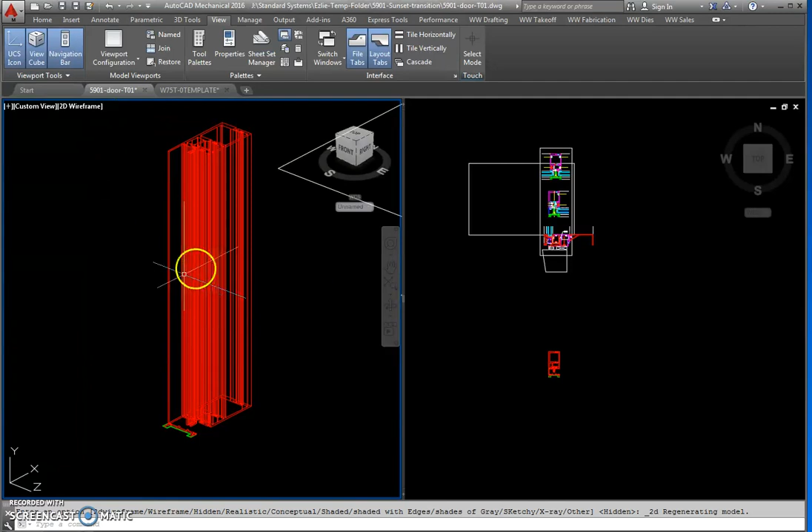If you just click on this word hidden, this is what 2D wireframe looks like. It's just a mess, a bunch of lines, so it's hard to work that way. Go ahead and click on this and change it to hidden, and that's the simplest way to work in 3D so your solid surfaces look like solid surfaces.

Just FYI on this project, right now I could not get these two parts fixed, so I'll have to dig into that a little more on Monday. But for now, we're just going to leave them as they are.

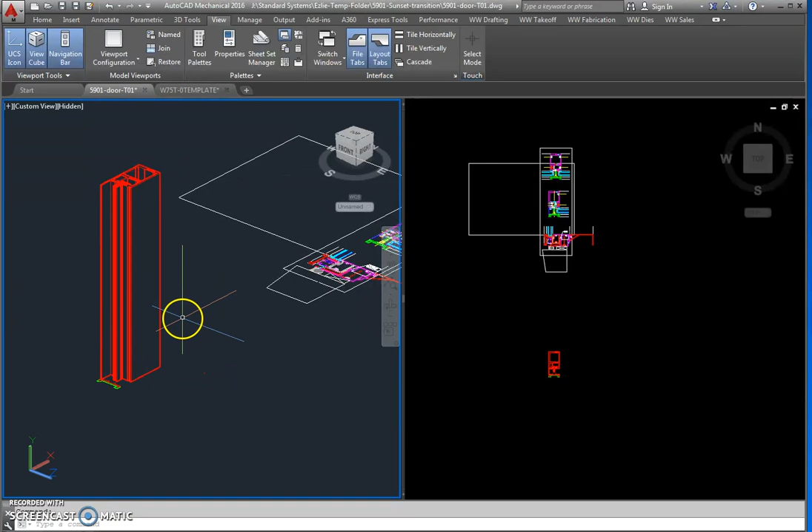Now we're going to extrude the sill member, which will butt up to this vertical member horizontally. To do that, we have to change our UCS. Our UCS is this icon on the bottom, which I know you're aware of. Just keep notice of the orientation it is right now: the Y is going vertically and the X is going left to right.

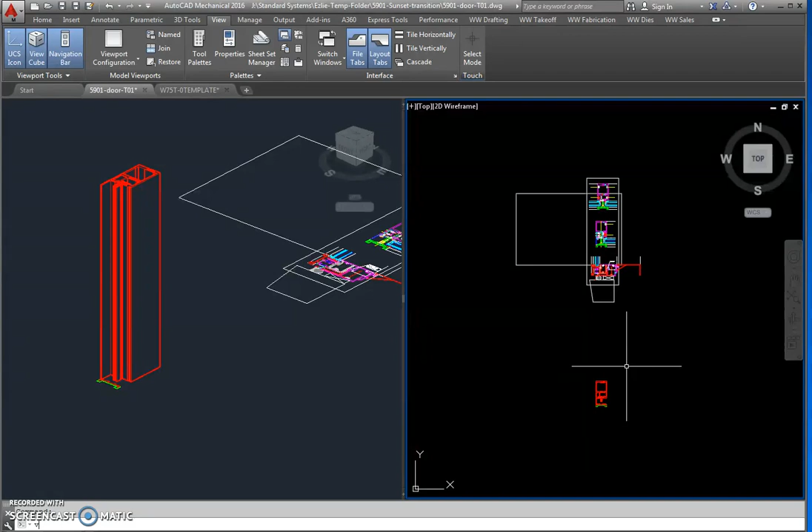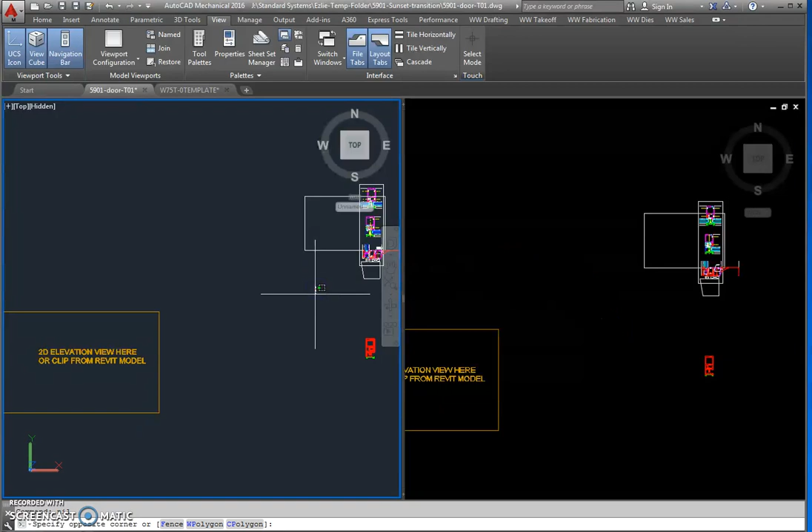To get back to this view, we have a couple default commands. If you type VPP, that means viewport plan, it'll automatically take you back to this plan setup of your UCS. So now if I go to this viewport, which is in a 3D view right now, if I type VPP, you'll see that it changes right back to the vertical plan view, which is the same as on this right side 2D view. Same stuff, just a different view of the same objects.

But now if you want to go back to your isometric view on this left side, we have a command called VPI, which stands for viewport isometric. If I type VPI, it automatically takes me to this 3D view. So those are helpful commands to keep handy. You see how our X and Y is the same orientation as it was in the plan view, it's just that the Z is going vertical and you're looking at it in an ISO view. So those are two commands, VPP for plan view and VPI for isometric.

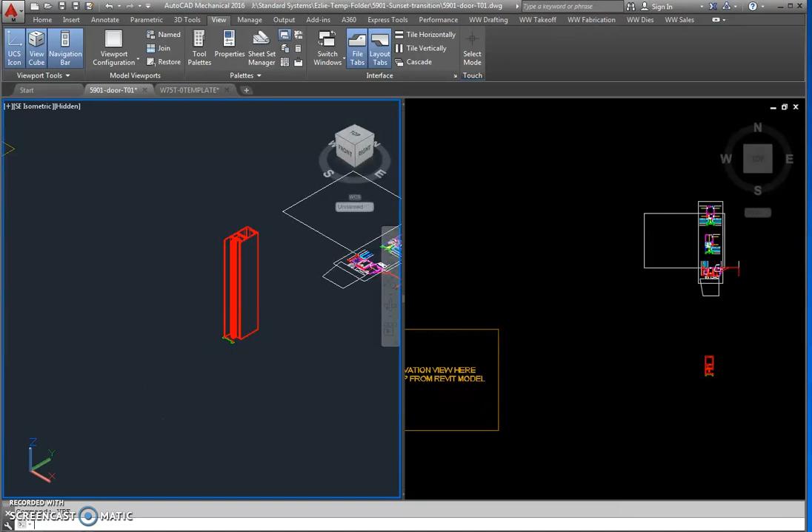For horizontals now, we're going to need one more command, which will be VPE. If I type VPE, you'll see what that does - it takes me to a perpendicular view of that mullion, which is what we need when modeling the horizontal. Because now we want the horizontal to be extruded along that x-axis, which in this view is the z-axis coming at us. That was VPE - I think the E stands for end view.

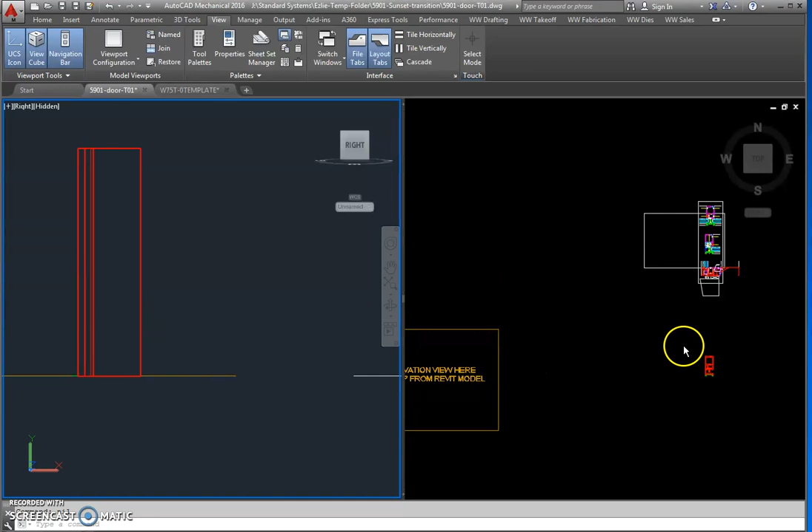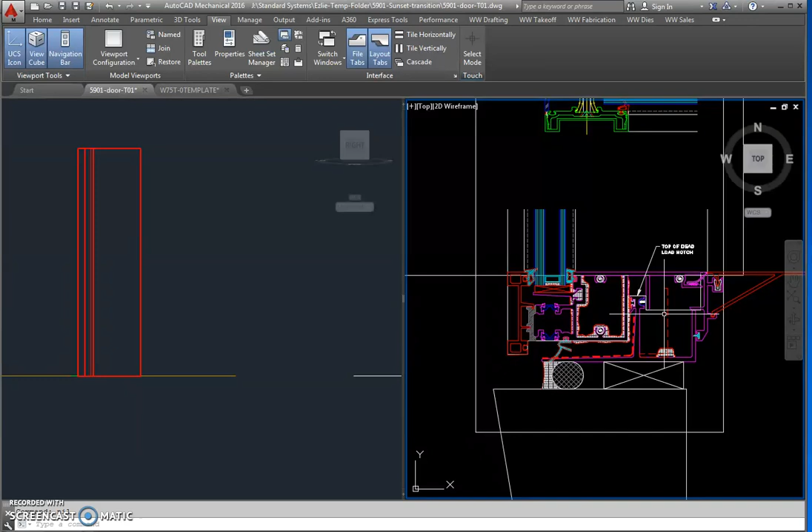Let me show you how you're going to get your horizontal. We're going to do a cut and paste now. From the vertical, all we did was a basic copy, but now since we're changing our view, we need to do a cut and paste. So a Control-C, and we're going to use the pocket of the mullion as our base point, because that's a point we can click on easily. I'm going to click on that as my base point. And now, to select objects, I'm going to select the extrusion, both the outside and that interior part.

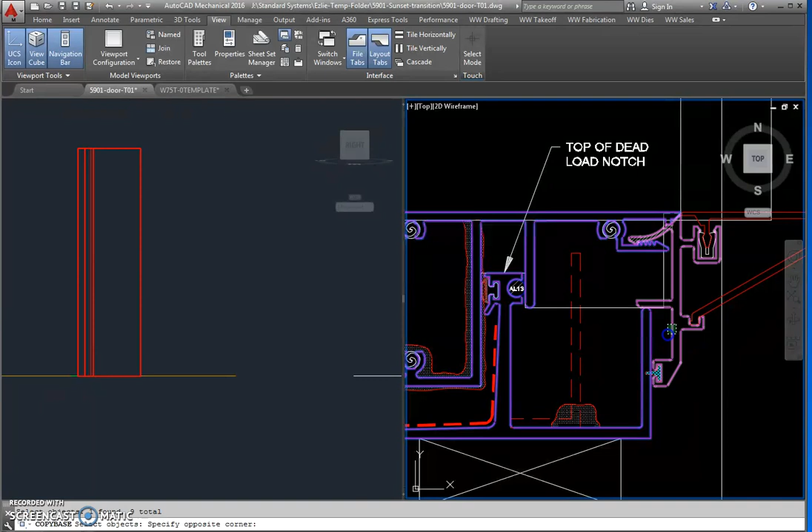Don't forget these blue ISO bars. Just pick all the lines of the extruded parts. We'll need these little cavities in there as well, and we'll also need the sill track, and we're going to need this back filler piece. We'll just do those three. Now I hit enter, and now those are copied on my clipboard.

So now I'm going to go back to this view. If it's hard for you to tell where that pocket is, I'm doing a shift in my wheel to kind of rotate, and I'm going to zoom in here so you can get a viewpoint. This is the corner of the pocket - that line there.

So now if I go back to VPE, now I have a better idea. It's going to be this first line here, that corner, is the edge of the pocket of the vertical.

And if it helps, we could change the color of the angle so it's easier to see that that's not part of the mullion. Usually I do change the colors - I have standard layers in this template for the different objects. Right now it just extruded on the sealant layer because that was the layer I was on, but I do have different vertical 1, 2, 3, miscellaneous parts 1, 2, 3, things like that with different colors already set up. So as you can see, that makes it a little easier, now you could tell that's a different part. Let me just go back into this ISO view so you could better see what I just did.

So I just changed the color of that little member here so that you could more readily see the edge of this jamb mullion. Okay, so now again, I'm going to go back to VPE.

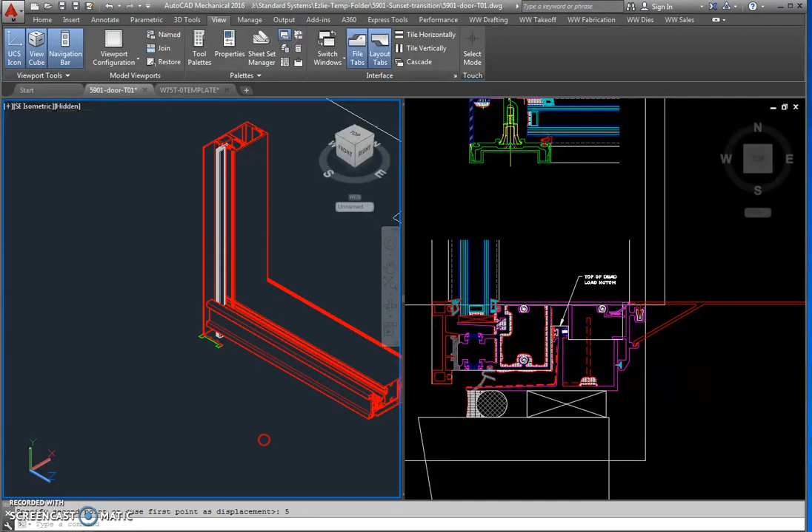So depending on what you're modeling, you can move this now to the correct spot. You may not want to go in and out because you already placed it correctly so that the pockets align. So in this instance, we can go up and down to get it correct on this mullion. So I'm just going to go up. Again, if this is relative to a small segment, so I'm just going to go up maybe 5 inches to represent the sill itself. And like I said, we'll do some cleanup later, but at least you'll have the parts modeled and in the right spots.

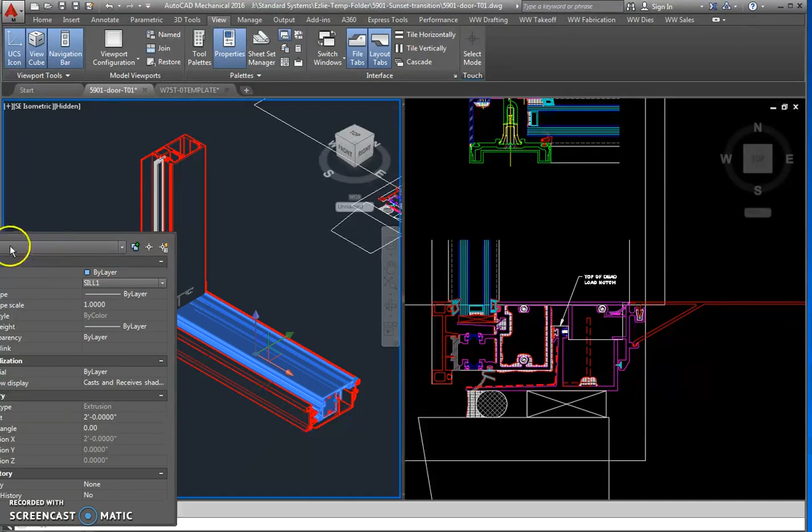Okay, so the next thing would be, like I said, I would probably change the colors so it's easier to tell what is what. So again, you would just like normal AutoCAD, click on a member, PR for properties, and then you can see what layers I have already set up. So this is a sill member. So I do have a layer for sill. So you can see I have sill 1 and 2.

So just start changing them to the correct layers, and that would be a good help. So all of these parts related to the sill would be sill. Then I have a separate layer for the sill track. And then same with the verticals. I have vertical 1, 2, and 3. So the left side could be vertical 1, and then the right side could be vertical 2, just so that they're different colors, a little easier to see.

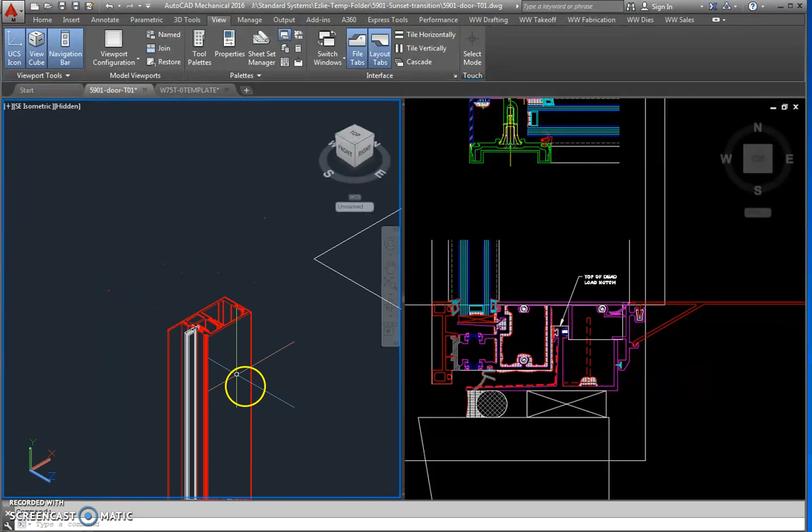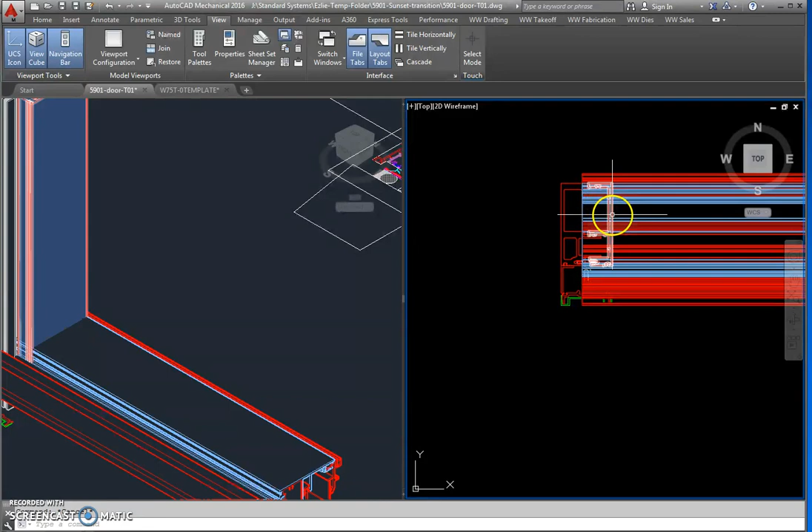And then as you can see here, our extrusion of the sill actually goes in. So let's look at this vertically here. So I'm going to go back to this 2D view. And now that we changed the colors, it's easier to see. But you see how it should be daylight, which is over here, right? So this is an easy fix, an easy thing to move. And this is why you want this 2D view.

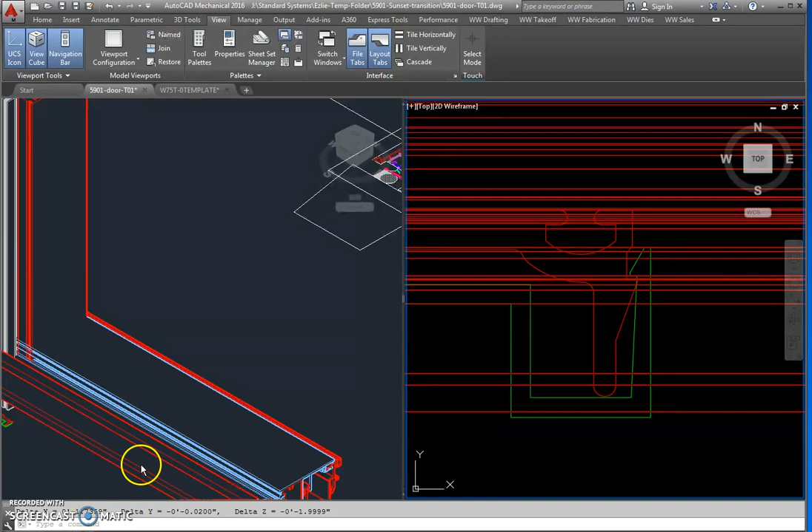So on this 2D view, I could just do a DI for a distance. And I can grab from an endpoint to the daylight. And so this is in the X plane. So I see I need to move it over this weird number, 1.7359. So now I could go back here in model space.

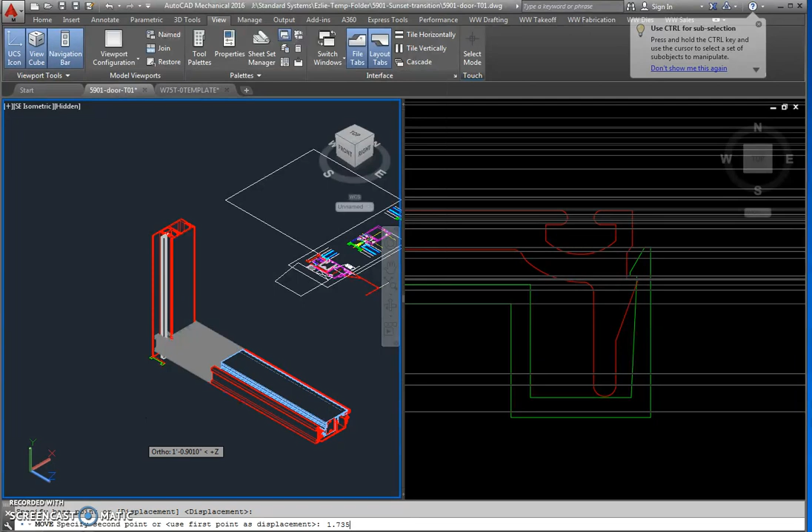Highlight all these members, do a move, and again, make sure my ortho is on. And now I could just hit 1.7359. And now I know that's exactly where it needs to be. And you can see now my plan view updated perfectly, and it's right where it should be. So that's why it's helpful to have this plan view right next to the ISO view. It's a little easier to work that way, check your dimensions, and make sure things got moved the correct way that you wanted them to.

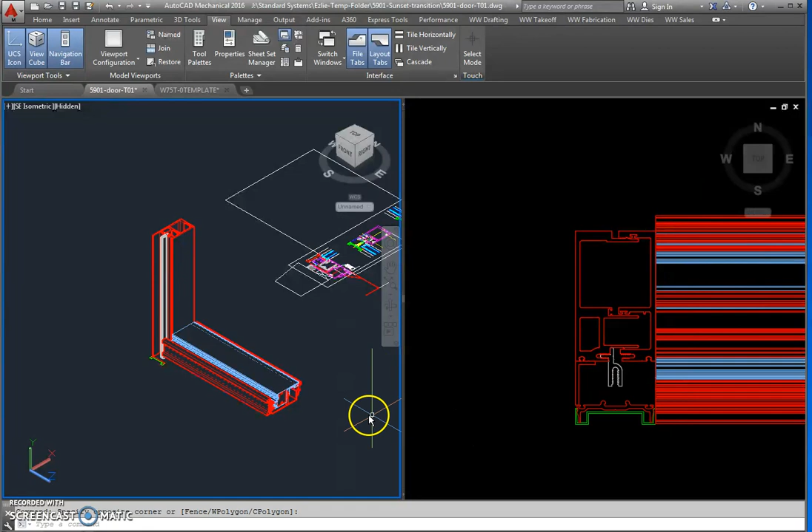So this would be the extent that I would need your help with to get some extrusions in the right places and the right orientation. We're going to be doing some basic intersections of vertical members to horizontal members. So if we could get this far, that would be a huge help to get our modeling going on a lot of these transitions. So play around with it and practice, get used to the commands, and see what questions come up, and just get a little more comfortable with doing this part.

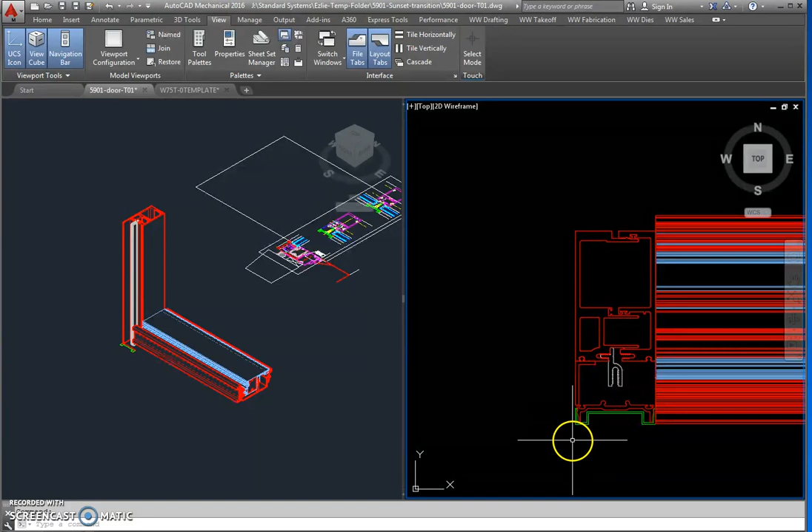Okay, and then again, I will do a little more research on my end on how to fix these parts and why they're not extruding. All right, that is it. Thank you. Let me know if you have any questions.